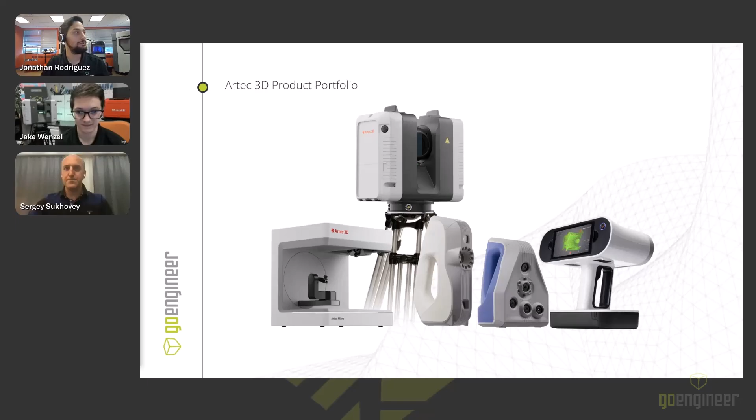So again, we're going to be focusing on the Artec Ray II and the Leo, where they fit separately, and especially one of the cool features from Artec, how they fit well together.

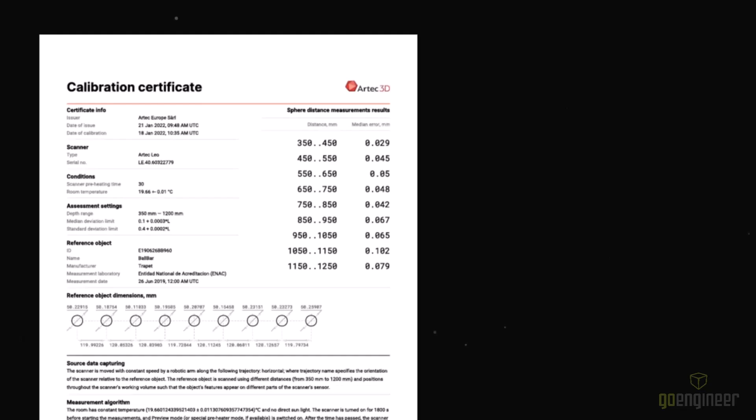Right. So as I mentioned briefly, this is the new and improved Artec Leo. There was an original one. They look pretty similar, but this one is everything that one did well and just improvements everywhere. Improved accuracy, improved processing, and a host of other great features. This is an entirely wireless 3D scanner.

It captures full color. Additionally, one of the things I wanted to highlight was the kind of internal heating mode. So one of the things we often talk about with 3D scanning is when you're going to calibrate the 3D scanner, making sure it's acclimated to your environment. And in this case, they've addressed that and added a tool to make sure that the scanner is staying in a consistent temperature and that the environment is staying as controlled as possible.

Is anyone else getting feedback? Or is it just me? Got a little bit. Okay. All right.

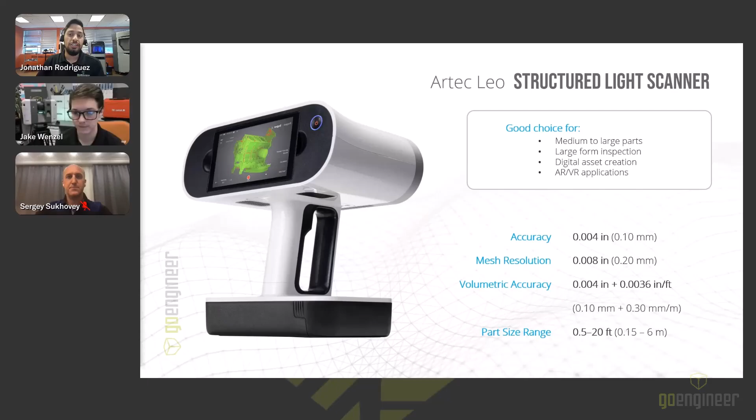So again, this is a structured light scanner. It's completely handheld and wireless. So if you're looking to go into tight areas, if you're looking to go on the move out into the field scanning parts, this is a great tool for that. It has a battery pack with it on the bottom. The battery, if you're not using the heated mode, actually goes for about 8 hours. And then of course you can swap batteries out if you need to. So a lot of flexibility as well as having the processing power on board.

And just to pile on there, one of the really cool things about this scanner is because it's completely wireless, you can go from having it in the case to being out and scanning in a matter of seconds. We're really talking like 30 seconds to open the case, power it on, and then get scanning. Another thing is it's entirely self-tracked, so you don't have any kind of targets that you need to worry about. So in that 30 seconds from opening the case to powering on the scanner, you don't need to pause and start putting targets on stuff either. You just go ahead and start scanning, and it figures out exactly where it is and captures data, kind of like a breeze.

Oh, John, you're muted. Sorry, I was trying to see if the feedback was coming from me.

As we're talking about the temperature control here, so yes, Michael, typically with all scanning tools or just measuring tools in general, temperature variations can have an effect. And so one of the recommendations we always have is give the scanner roughly 30 minutes to acclimate to its environment. But if you're having drastic temperature variations, like let's say you're going in and out of a carport or something like that, so out into snow, coming back inside, etc., where you can't really give it that time to adjust, then this may be a great tool for you to work around that.

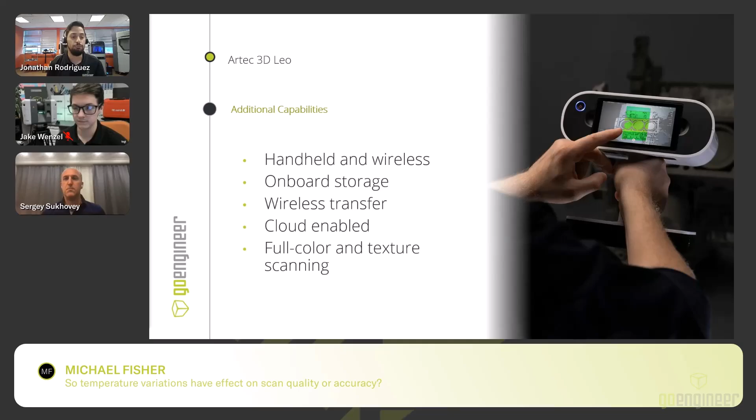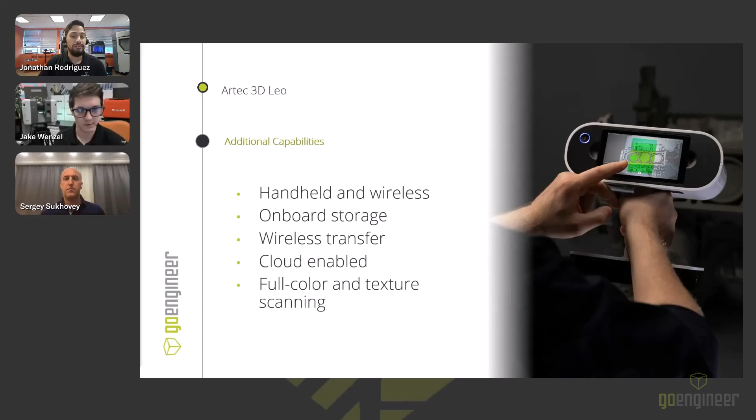All right, and next up, I think we got the Ray here. Absolutely. Artec Ray II.

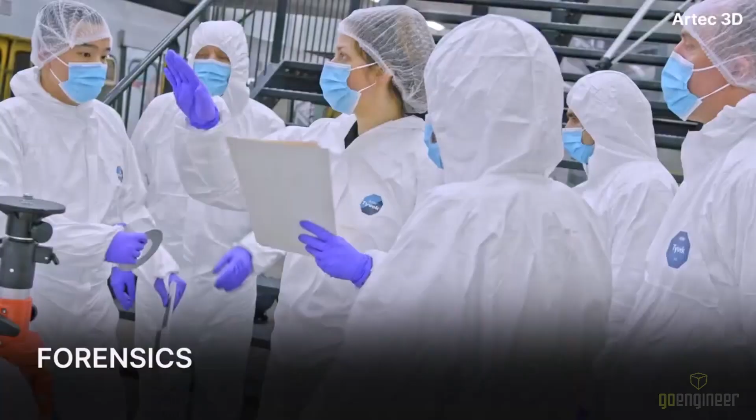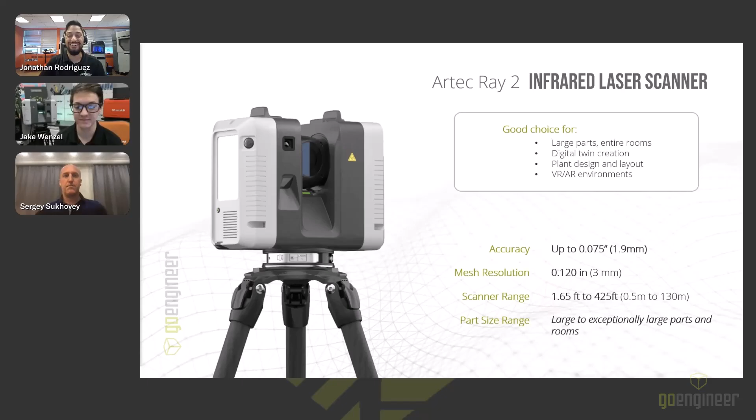So the Ray II, the new and improved Ray II, is combining LiDAR and time-of-flight scanning technology. So typically when you're assessing these type of tripod scanners, you're looking at one or the other. Artec is leveraging both. One of the things I want to highlight especially is using the GPS and a host of other sensors to help align your different scans in space. So you're not fiddling about in the software trying to get everything lined up, figuring out where each piece of the scene goes. It's handling all of that on board. So as soon as you bring it into Artec Studio, everything's already where it belongs.

Yeah, that's one of these features on this scanner that really does just feel like magic, because you plop it down, take a scan, pick it up and move it, and it knows exactly where it's moved, exactly where to put the new set of data in comparison to the old set of data.

And it does have some ingress protection, IP54, for those who are interested or maybe do more of their scanning outdoors. So this is something I had a customer already ask about once. It does have some ingress protection. You can find more information on the website, but certainly that is something to keep in mind when you're taking this outdoors in maybe some light rain or kind of dusty areas.

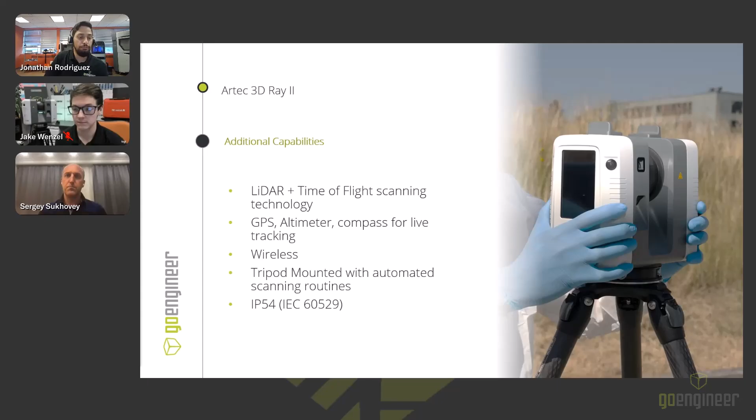So again, I talked about the Ray II for large scenes. This was actually Jake's project, so I'll let him speak to it a bit more, but I had never seen this before. It was Buffalo Creek Weir. And I can just say, as the guy who post-processed this file, it is massive. So I'll let Jake take this one away.

Yeah, so this is kind of a dam-like structure that's nearby our office here, and it was one of the first opportunities I had to go out with the Ray II and start doing some scanning. So I set this up, and you can kind of see in that right side picture just how large this area is. I took maybe 20 scans within the course of an hour and captured that entire concrete structure plus all the surrounding areas.

So the speed at which you can capture really high quality scans with the Ray is really impressive. You can just take it on site, let it run, and move it when it needs to. This was kind of one of our first test scans, but you can see how it captured all of the concrete and everything in there. You can imagine if you needed to do some measurements and track maybe how the concrete was moving over time or settling or something like that, this would be an invaluable tool in order to do that.

Yeah, I will also add, if you have questions about how long it takes from training to setting this Ray II up and capturing data, this was Jake's first scan. He took this thing out, set it up, pressed go, and captured. This is only a fraction of the scan data. Again, I post-processed it, and this is probably about one fifth of everything he captured. It was close to 200 million points, and the file all in was about 40 gigs.

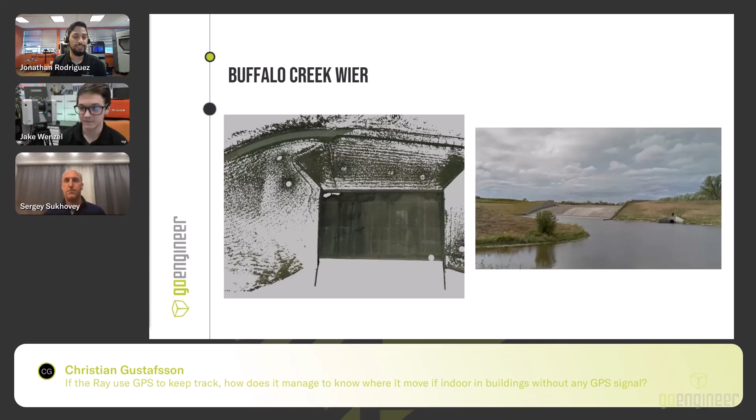Again, what we really wanted to highlight is how they work well together. The Artec Ray II and the Leo work excellent together, and it's not just a matter of, hey, Artec makes both scanners and they should be able to work. It goes much deeper than that. You can leverage the Ray II and its host of sensors to grab the whole scene, as much data as you can possibly imagine, position itself in space as you move the tripod, and then come back with the Leo to grab those fine details.

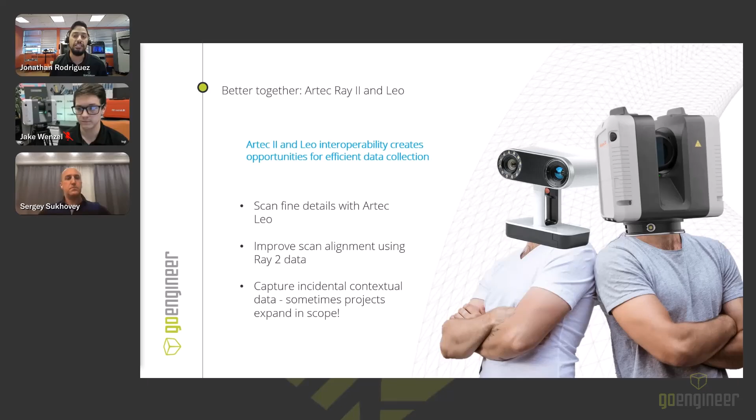Instead of relying on any tricks or proper positioning or just knowing how to fiddle around the software to align the Artec Leo scans, you can just bring them into your session and align them using the Artec Ray. So the Ray is kind of handling your volumetric accuracy and your alignment and grabbing most of the data, and the Leo is going to allow you to go into those fine areas and grab that additional information if you need it. Yeah, this has a couple different benefits.

The first thing is you can go in and scan high detail areas and then arrange them as you need within a scene. So if you're trying to figure out where different utilities run, imagine wire, conduit, or HVAC, you can track them from one area of interest to another and use the Ray to figure out exactly where all those connections need to physically exist.

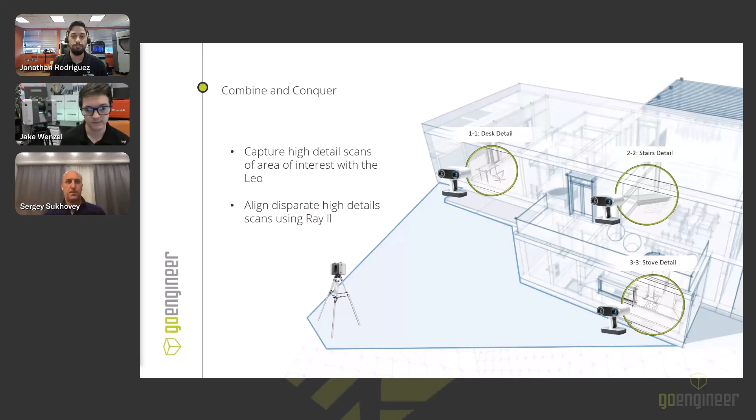Yep. Oh, school's over. Yeah, I think the battery's yelling at me, but I'll take care of that in a sec.

Another way you can use this is capturing high detail areas and objects, then arranging them within large spaces. Setting up a digital twin is something these systems really excel at, because you can capture the machines on your manufacturing floor exactly as they are, with correct scale and size. Then you use the Ray to capture the space around them. Once you have those two pieces of data, you can take those machines, pick them up, move them, and digitally arrange them to figure out the best orientation, taking into consideration things that would be very hard to do without a complete data set.

This tool is invaluable for us, especially when talking to customers on the printer side about outfitting a space. We can go in with the Ray, grab the whole scene, grab some fine features with the Leo, and say, here's your total space. How do we arrange things to optimize it? Where does your post-processing equipment go? Where do the tanks need to go if you have to pipe air into the machine, etc. This can be very useful if you're doing factory planning.

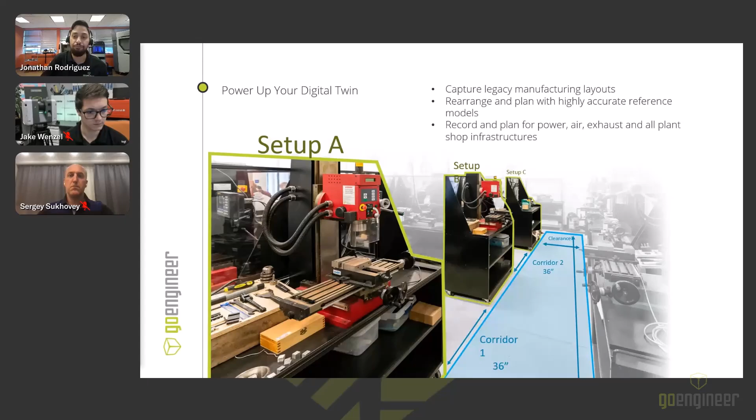Again, with the Leo you can go in and capture critical details in higher fidelity, higher resolution with color, combining the best of both worlds. You have all your alignments with the Ray, so you don't lose your bearings. You can align to that information, and you can grab more than you'll ever need.

The big thing is going on site, having maybe a few hours to take your measurements, and instead of grabbing what you think you need, you can grab all of it. So you're back in the office processing the data, grabbing the measurements you need, and you think, it'd be really great if we measured this - it's probably there. The Ray, with its automated functionality, is going to grab more information than you'll ever need, just like that Buffalo Creek Weir. Then it's just a matter of figuring out what information we need, and going in with the Leo to grab that high definition.

We'll get into the rail yard in a sec, but another cool thing about using the Ray to capture data while scanning with the Leo is that it captures contextual information. So even if your area of interest is just what you're looking at with the Leo, maybe you're doing reverse engineering, or you need to build something that fits whatever you're scanning - scopes of projects change sometimes. And if you're going onto a customer site to collect data, often that's the only time you'll have to actually go to that site and collect it. You won't be able to get back on site to do that again.

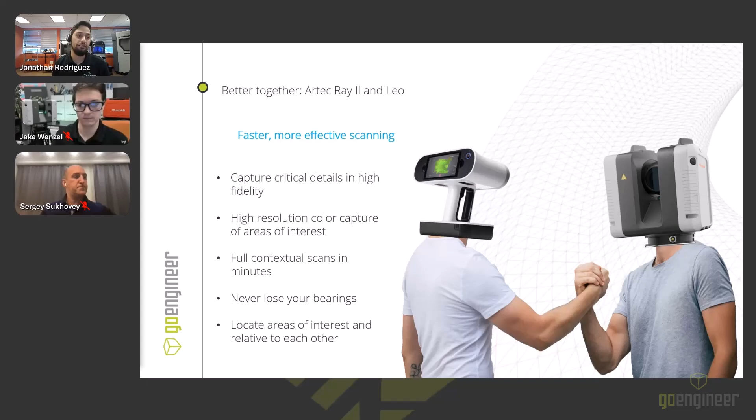So then again, it's just a matter of how do we leverage that later. We can focus in on some of those features that we needed, but then we have that contextual data to say, okay, well, this is how it's positioned in space, this is how it's interacting with the rest of the assembly or fitting in this factory layout. And then we can kind of expand our scope and address some of that other information that we have available to us. Actually, one of our case studies highlights this one really well.

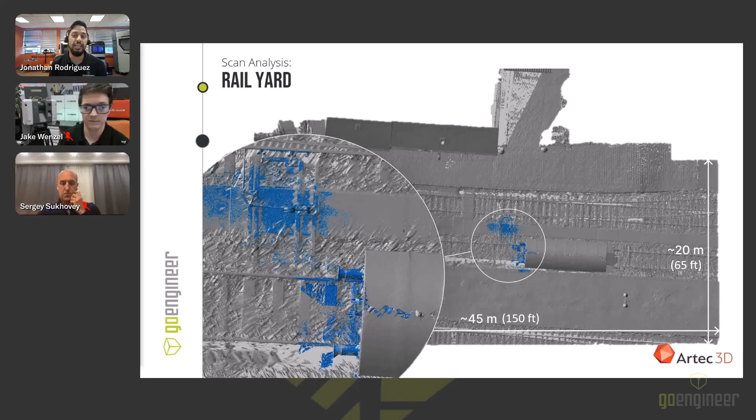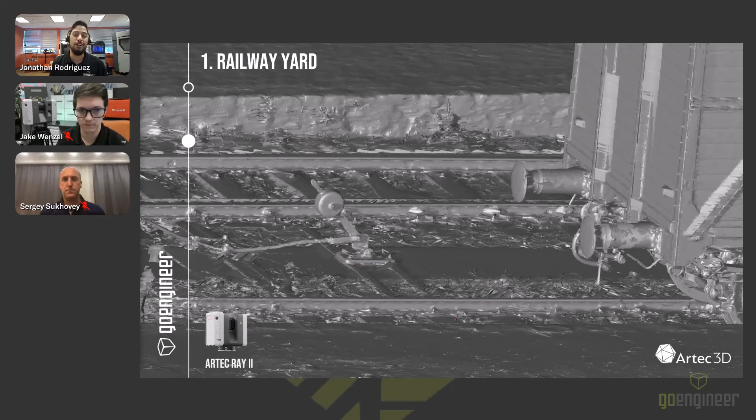And especially in some of these later photos, we see what the Artec Ray is able to capture. And again, I want everybody to keep in mind when we're looking at some of these photos that we're scanning this from very far away. So this level of detail from 50 meters out is absolutely incredible. And then of course, with the Leo, we can go back in and grab something a little higher resolution, a closer standoff distance, something where we need to focus in on, and then incorporate that with the Ray.

Real quick, I'm not sure if we mentioned the range of the Ray scanner, but you can scan things up to 130 meters away. It's going to be able to capture data from that distance. There is kind of a gradient of accuracy that goes along with that. So if you scan things closer, you're going to have a higher accuracy, a higher resolution mesh, but up to 130 meters. So it's just a ridiculous distance that you can scan from.

Yes, absolutely. When we talk about contextual data, not only are you getting the part that you're scanning, you're getting the parking lot out and some of the cars too.

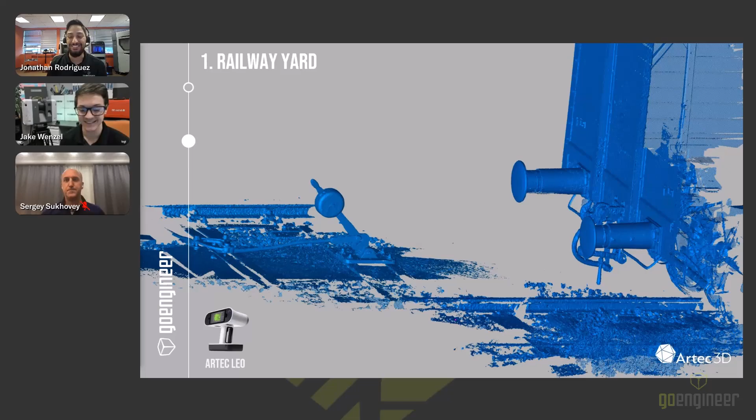And then of course, I want to especially highlight that this is not just something where the Leo and the Ray work nicely together because they're both from Artec. This is really a decision that was made to make them work well together and to give you a lot of functionality that you don't necessarily have with them separately.

So here's actually the Artec Leo and Artec Ray data overlaid, aligned by the Artec Ray within their software. And you can combine the higher resolution version of the Artec Leo with the Ray. They also have some really impressive smart fusion algorithms that take the best data from both.

So it's not only saying, hey, this should be better and this one should be worse. It's actually looking deeper than that, measuring the error that is being introduced, and it's taking the best of both worlds.

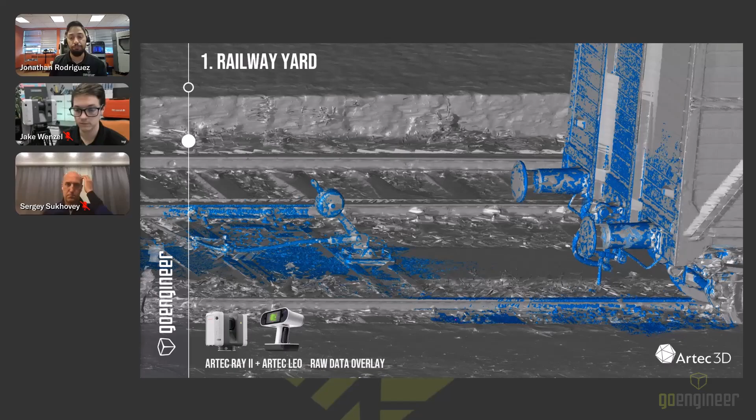So here you can actually see the resolution from the Ray up top, as well as the resolution when you combine both systems below. Just really take a look at some of the mechanical elements, the bits and bobs on the train, the little lever mechanism kind of in the center of the screen. You can just see that there's a much, much higher level of fidelity to the Artec Ray and the Leo scan at the bottom.

And the kicker to that is that you still get all that same context that you have with the Ray. You know exactly where those high fidelity elements exist within the world. So if you need to make connections further away than what the Leo can do, that all becomes possible now.

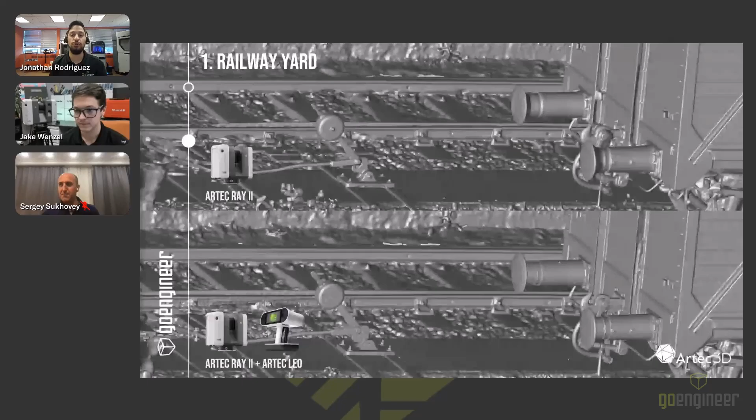Perfectly well said. Then here's another visual. Again, you have the Ray II up top, and then the Ray II and the Artec Leo below. What immediately stood out to me when I saw this file was just the pattern on the surfaces that were captured within the Leo. It's this very fine kind of crossing diamond pattern that gets picked up super easy, aligned, and you just have this global kind of scanning out to 130 meters of this whole train yard, but then you have this really incredibly fine detail in the areas that you need it.

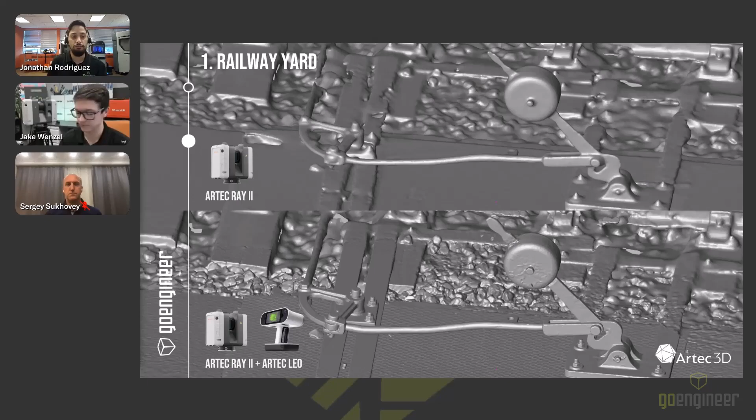We're going to see a little bit more of a detail on that diamond pattern, I think, on the next slide. Yeah, absolutely, there she is. Yeah, so I mean, the Ray is capturing a lot here, but the hardware is not designed to capture the level of detail that the Leo is. So, it's best of both worlds, bring them together.

Absolutely. Yep. And so especially if you're looking at this and you're thinking in your mind, do I need a Ray? Do I need a Leo? Do I potentially need both? The first thing to think of is the Ray is capturing a ton of data. And for many of our customers that are looking to do factory planning or massive sites or maybe steel mills like Michael had mentioned in the chat, this may be perfectly suitable for it, and oftentimes it is. And then the Leo might be great for some of those smaller things if you're working on those level of resolutions. But they can also be combined.

And the second thing is you can certainly always reach out to us, and we can work with you directly on which one makes sense in which scenario and how you can get either the best of both worlds, or maybe you just need a Leo, maybe you need a Ray.

So I do want to highlight this. Oh, sorry, share this one. Yeah, Chris. So the Ray does have really fine detail as well. The way it specs out on the spec sheet, and we can share that with you, is that the closer your standoff distance, the higher resolution mode you have available to you. And so what you're looking at with this railway yard is a feature that is very far away from where the Ray was standing.

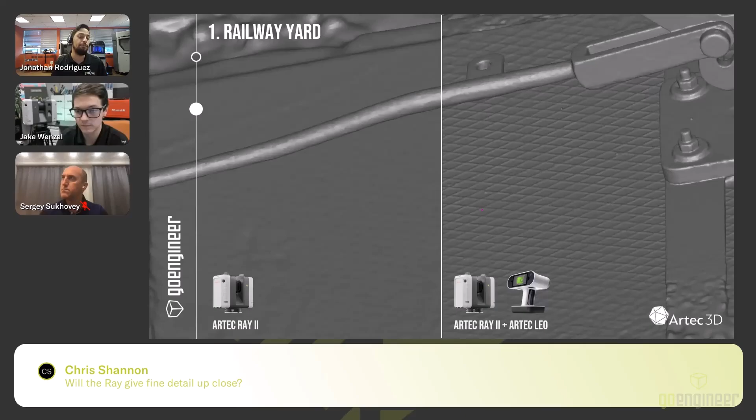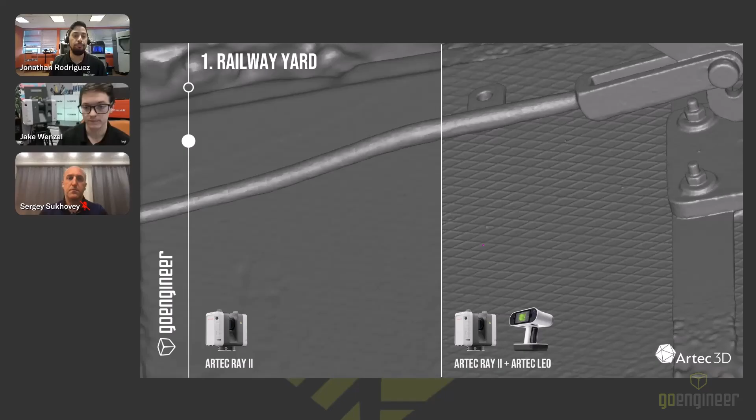Yeah, so real quick, just to add some numbers to that, we're talking a resolution of 3 millimeters under 10 meters. That's the highest resolution that you're going to get off the Ray. Mhm. Perfect. Yep.

Yeah, so here's a little Q&A break. I know you guys have been throwing stuff into chat, and we've got another question here, but I just want to welcome any questions from any direction. We're here to introduce this hardware to you guys. So if there's any basic questions about where they might be used or how it might be useful in your situation, it's all going to be beneficial to talk about and put out there for everybody. So feel free to throw anything in there. Looks like Scott's got a question here. Scott and Jake.

Let's do Jake's first. So Jake is asking, what happens if something moves during a scan? Are there ways to capture scenes with motion? First part of that question, if you scan something while it's moving, it's the same kind of thing that you're going to get with most scanners. You're going to have kind of a doubling of that data. So it's going to scan the object in the first position, and then if it sees it again in a second position, it's going to recollect data in those areas as well.

Second part of the question, are there ways to scan scenes with motion? There actually are. So the Artec Ray has a feature built into it called double scan, where it would actually go through and scan twice, and any kind of data that it doesn't see twice, it's going to get rid of for you.

So it kind of mitigates that motion, people moving through a scene issue. Obviously it's scanning twice, so it's going to double the amount of time that your scan takes. But if we're talking 2-3 minutes for a scan, it's not too bad. It's not the end of the world. Mhm. Yes, so well said.

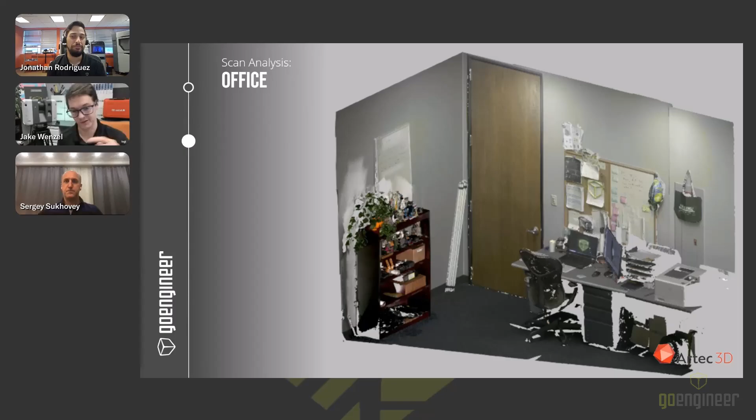So this is Jake's office. Jake, do you want to tell us about your office? Yeah, so this was another pretty early project that I took on for the Ray, and it was kind of an experiment with scanning a relatively small enclosed space just to see what kind of results I would get. So if you flick us forward one more, I think I have a general picture. Yeah, so there is the back of my office, and then here these are some details on the quality

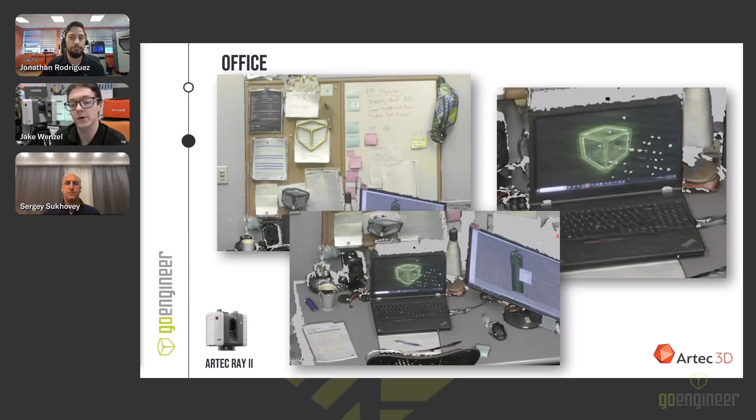of the Ray. So this was scanning at the highest resolution, and I think somebody was asking about the quality of the Ray that you can get close up. Take a look at the laptop there, and that's going to be about typical. So one thing I did with this was I didn't do any hole filling because I just wanted the surface data here.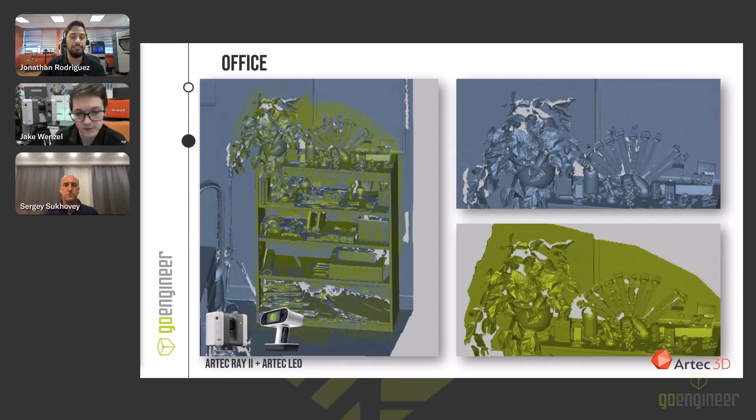But if we go a little bit forward now, I took these scan data sets and I combined them with the Leo. So you can see, at the top in the blue, we have the Artec Ray, and then at the bottom, we've got the Leo. So there's kind of an improvement in quality as you go between those. Yeah, absolutely.

A couple more examples coming up here. Yeah, so this one I want to absolutely mention the detail of the leaves from both of them. This impressed me greatly because I've never seen Jake's office, but I definitely have a clear visual of what it looks like. And again, just the resolution from being close range, whether with the Leo or the Ray II, in many situations, it's good enough for the Ray II.

It's something that I want to highlight. It's not a slouch when it comes to getting high resolution scans. We're getting details of some pretty small parts on his desk, as well as seeing the laptop, keyboard, even just from a color texture standpoint, getting to actually see the icons on his screen and everything else.

Yeah. So before we flip off this slide, I just want to point out, the leaves both look pretty good. I was pretty impressed with how the Artec resolved the leaves there. I was a little bit disappointed because I wanted more of a difference between the Leo and the Ray, in fact. But if you look at some of the more mechanical type objects on that shelf, particularly right in the middle where you have that little Go object, you can just compare the two of those and see that the corners come out much sharper on that.

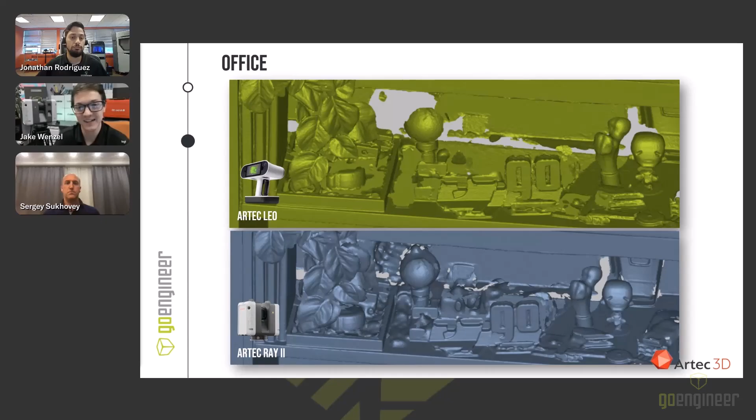So this is kind of what we're talking about, where the Ray is great for representing very large scale form type objects. But if you need to go in, get details, and get measurements off of these objects, like in any kind of mechanical sense, you're doing reverse engineering, or you need to build something that fits that part in some capacity, that's where you just need to go to the Leo, because you just need that increased level of detail. Absolutely. Yeah, well said.

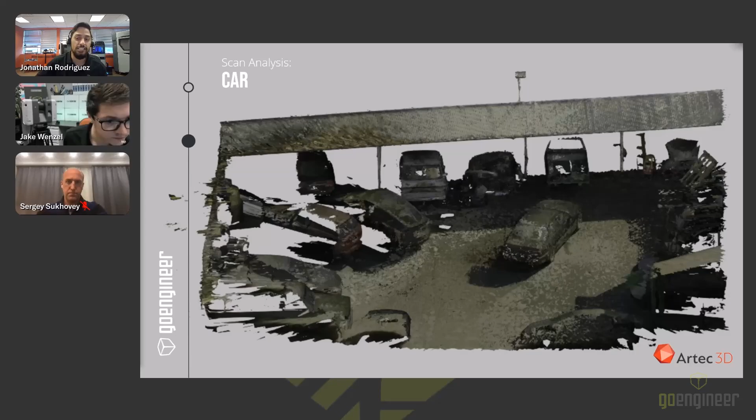I'm going to skip that one. So this is another Artec scan that was provided to us. So again, thank you to Sergey and his team. But this is a parking lot with a poor sad BMW that was taken too soon. Here you can see they've grabbed a lot of contextual data with the Ray. You can see it's grabbed everything off to the side, and just visually looking at this, I could tell this was probably done in very few setups.

So how long roughly do you think this would have taken, Sergey, to scan something like this with the Ray II? I know you can see a little highlight here that they went back in with the Leo, but just grabbing the Ray, probably set up somewhere in the center and then maybe top right. How long roughly would that take? I would say for just the Ray scan, 4 or 5 setups would be enough, and each setup takes roughly 2 minutes. So that's it for the Ray scans, and then in the middle you see it's colored differently.

The car in the middle was scanned with the Leo scanner additionally, and this scan I would say would take 15-20 minutes, depending on your goals. I would say that this example is a good representation of the car crash investigation application, and it also relates to the crime scene investigation application. First of all, you need to scan the evidence itself. In this case, it's a damaged car, and investigators scan the car, digitize it to see the damages on the car body, to then describe the sequence of events that happened during the crash.

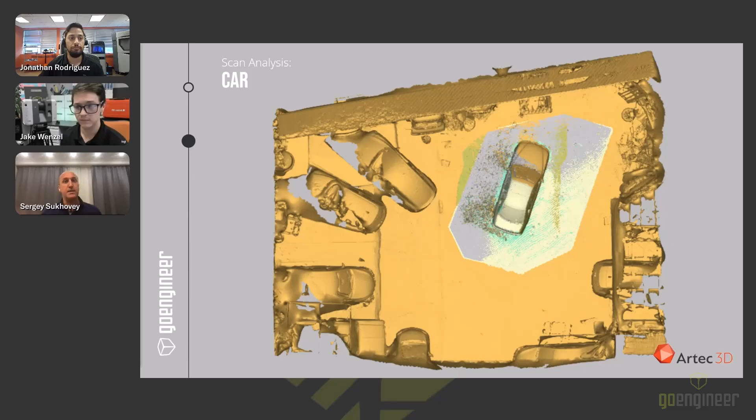But also they need to scan the relative position of the car to the environment, and if the accident involved other cars, which is typically the case, they want to see the relative position of the cars and other elements of the scene of the road. So in this case, you need both. Scan quite a large scene on one hand, and on the other hand, see specific elements of the scene in higher detail. In this case, the combination of the two, scanning the entire scene with the Ray, and then scanning with the Leo the exact elements of interest or damage, is a good combination to get the job done.

Absolutely. Yeah, and here's a close-up of the trunk area and the busted taillight of the BMW, gone back with the Leo. One of the questions that came in was the range of the Artec Leo, so it can scan up to 1.3 meters. There are some background removal tools that are quite useful for getting rid of data that you're accidentally capturing if you're going close. And of course, you can go higher resolution the closer you are to the part. If I remember off the top of my head, it's about 0.5 meter to 1.3 meters working range.

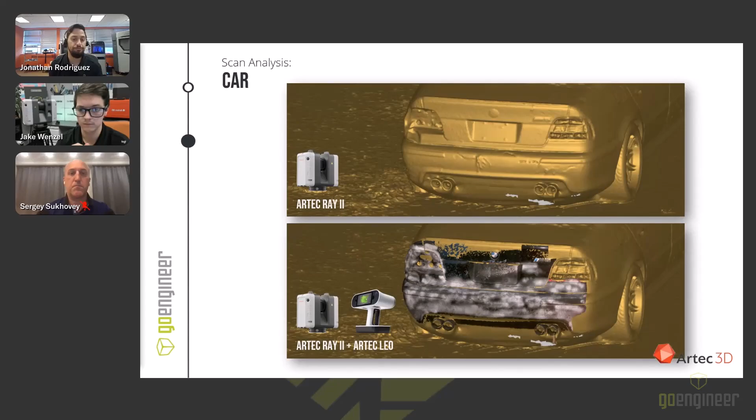Yeah, and here's a close-up of that bumper. And again, you can just see the difference in detail that you have here. The Ray is great for figuring out where everything exists in space, but if you need to get any information about the surfaces that you're actually looking at, aside from just location, the Leo does a great job of reconstructing those surfaces.

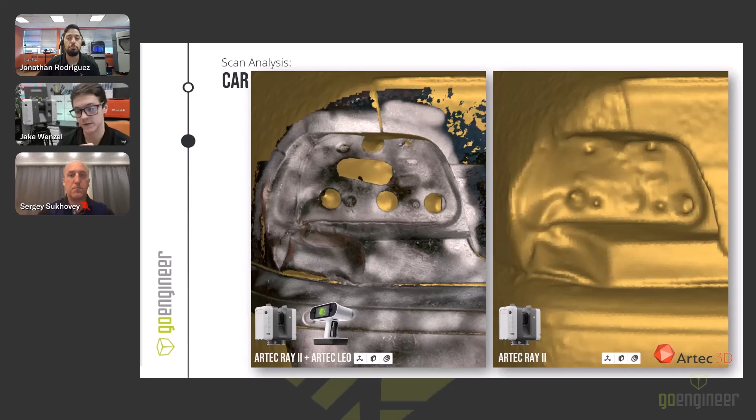So this is something that you could take and use for archival purposes or redesigning or measuring or stuff like that. There's plenty of things you can do with surfaces of that quality. Absolutely. Yeah.

So I'm gonna skip ahead because Jake has been kind enough to be answering questions as we're going along. Actually, you know what? I'll take a step back. There was one question about the scanning spray. To my knowledge, there was no scanning spray used in the scan for that BMW, correct, Sergey? You're muted. My apologies. No sprays were used in this case.

Sprays are only necessary when you have a very new car, brand new and very clean, and if it's too dark. In that case, not always, but in some cases you might need to use some spray. But for normal cars, you don't need spray at all. So they're quite scannable. Yep. And to add to that, on the Leo, there is a slider for adjusting the shutter speed if you need to allow more or less light coming in.

All right, and before we get into the remaining case studies, I wanted to address some of the SolidWorks and reverse engineering questions as well as the computer specs. First, what are the best computer specs needed for post-processing? For particularly large data sets, like what you might end up with the Ray II, more is better. More RAM is going to make things go faster and allow you to process larger data sets, more powerful CPU, more powerful GPU. I threw in a link to the recommended specs, but you can definitely exceed that if you need something better.

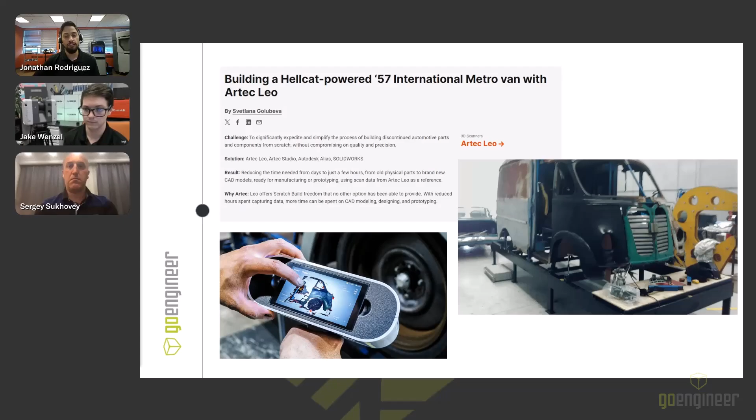All right, we've got like 4 minutes left here. Let's see. Yep.

Is there a software package that gives me metrology inspection and reverse engineering together? If you're looking for one company to provide reverse engineering and inspection, Geomagic DesignX and ControlX can handle both of those. Artec Studio has some reverse engineering tools within it as well. Reach out to us, we can give you a demo of the software and show what's available, and if you need something beyond that, we might recommend DesignX and ControlX. DesignX for reverse engineering, ControlX for inspection, and they're both from Geomagic.

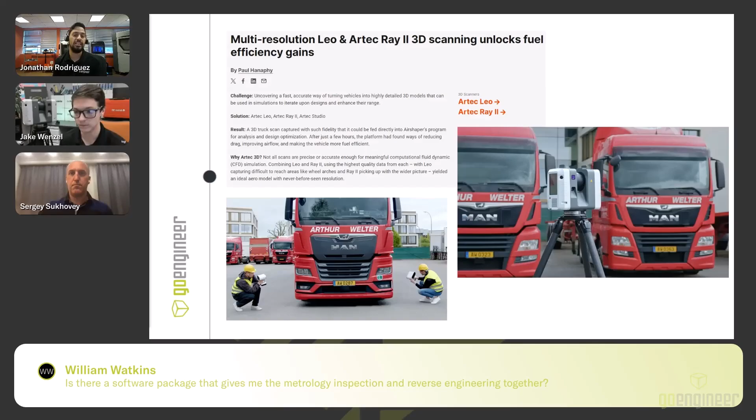Regarding the prices, I always say I am the technical guy, I'm not the sales guy, so I don't do numbers, but I'll throw out a ballpark. I think the Ray is around 88,000, and the Leo is around 40. Sound right, John? That sounds about right.

We also might have some of our sales reps hiding in the chat, so if anybody has some numbers off the top of their head. Things always fluctuate, whether there's promos and other things going on, so certainly the best way is to reach out, let the sales rep get with you and work on the quote and give you a better idea of what the whole thing would cost. But fortunately, we don't have to do paperwork on the tech side.

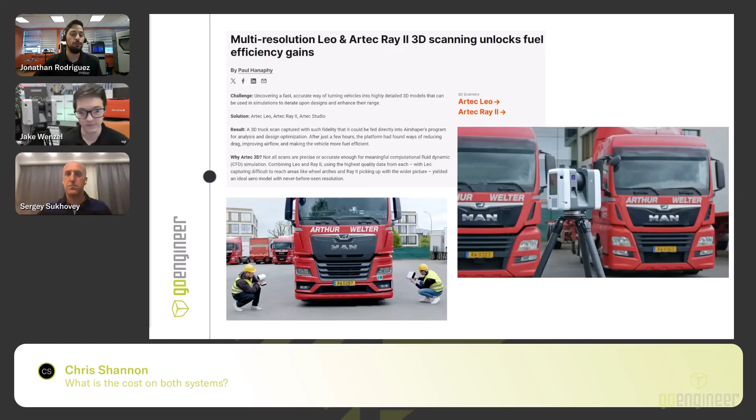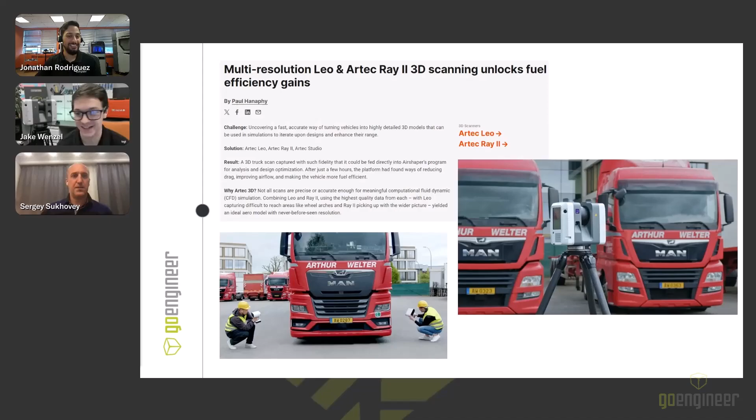All right, one more question here. Let's see, throw that up on the screen. Is there a software package that gives me metrology inspection and reverse engineering together? Oh, you already grabbed that one? Yep, I'm sorry, I'm not paying attention. It's okay, it's okay.